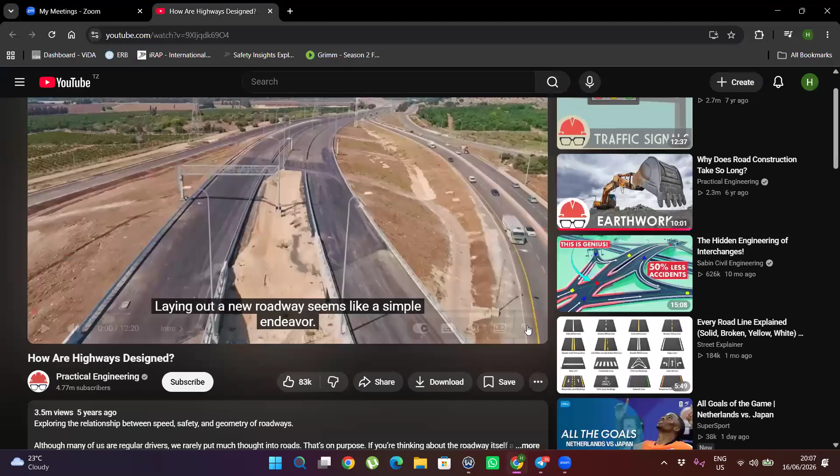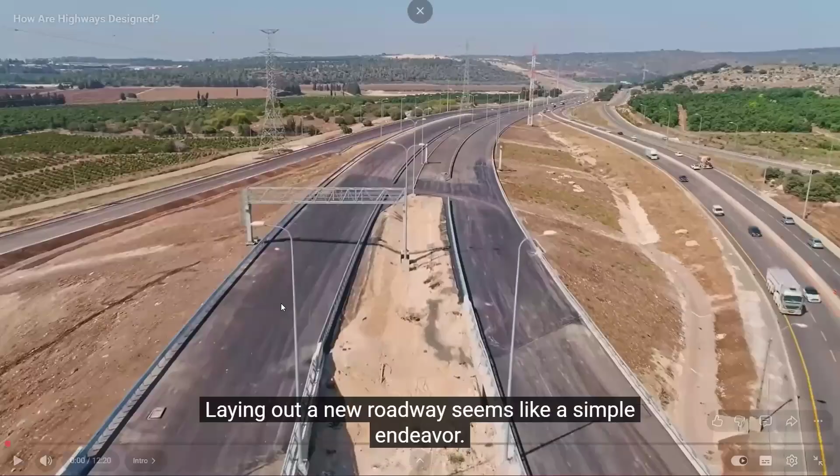A new roadway seems like a simple endeavor. You have two points to connect and you're trying to create a simple, efficient path between them. But there are lots of small decisions that make up roadway design, nearly every one of which is made to keep motorists safe and comfortable. Although many of us are regular drivers, we rarely put much thought into roads. That's on purpose. If you're thinking about the roadway itself at all while driving, it's probably because it was poorly designed. Either that, or you, like me, are just innately curious about the constructed environment.

If you put it in the context of human history and evolution, it's a remarkable thing we're able to put ourselves in metal boxes that hurtle away at incredible speeds from place to place. It's not entirely safe, but it's safe enough that most of the world chooses to do it on a regular basis. And the place that level of safety and comfort starts isn't immediately evident to the casual observer. Hey, I'm Grady, and this is Practical Engineering. On today's episode, we're talking about roadway geometrics and the shape of highways.

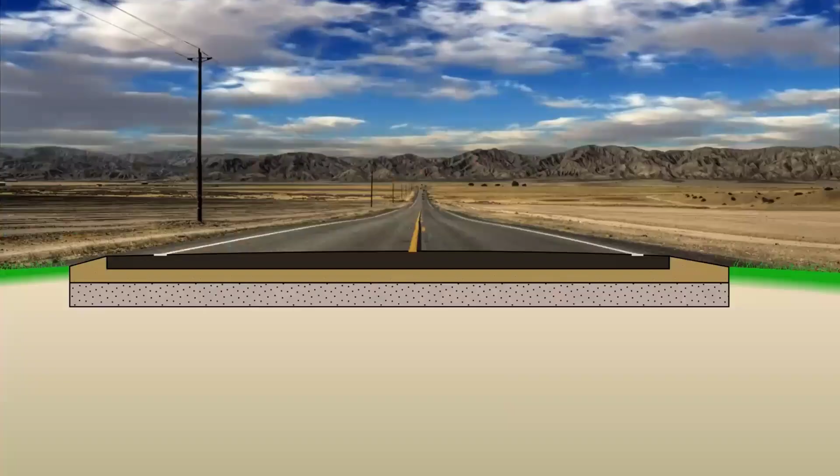The first one, cross-section, is the shape of the road if you were to cut across it. The roadway cross-section shows so much information, like the number of lanes, their widths and slopes, and whether there's a median, shoulders, sidewalks, or curbs.

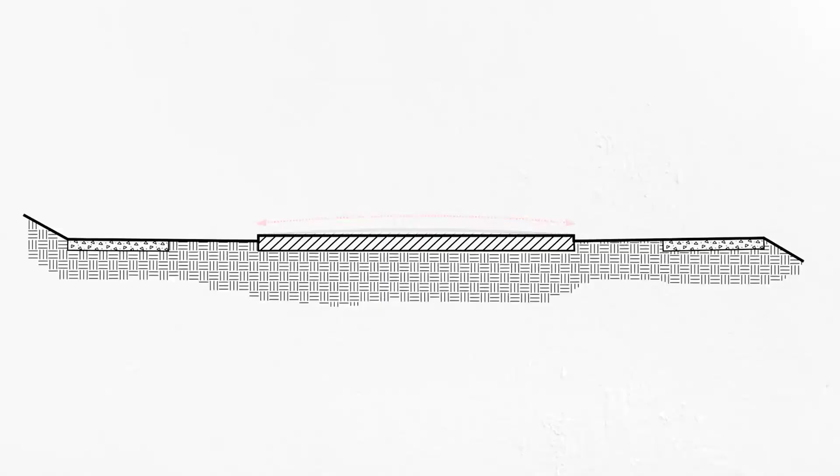One thing you might notice looking at roadway cross-sections is that they're almost never flat. The reason is that a flat surface doesn't shed water quickly. This accumulation of water on the road is dangerous to vehicles, making roads slippery and creating more ice in the winter. So nearly all roads are crowned, meaning they have a cross slope away from the center, which accelerates drainage of precipitation and keeps the surface of the road dry.

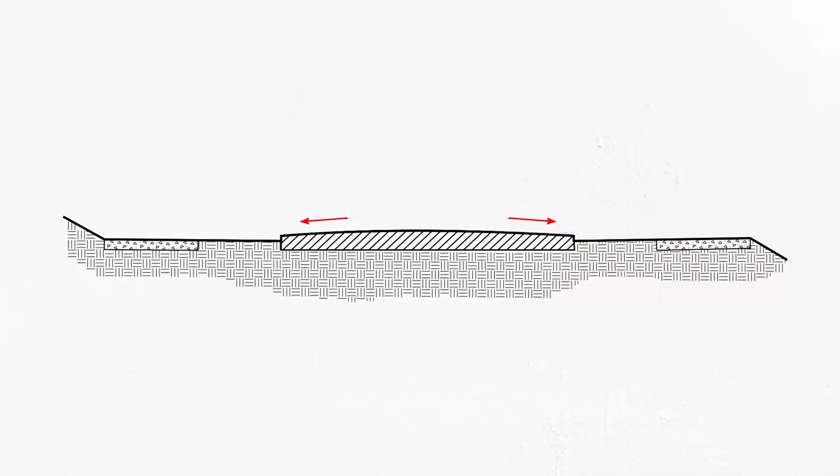But not all roadways are crowned. There's another type of cross slope that helps make roads safer. In curved sections, engineers make the outside edge higher, or super elevated, above the center line. This is also to help with friction.

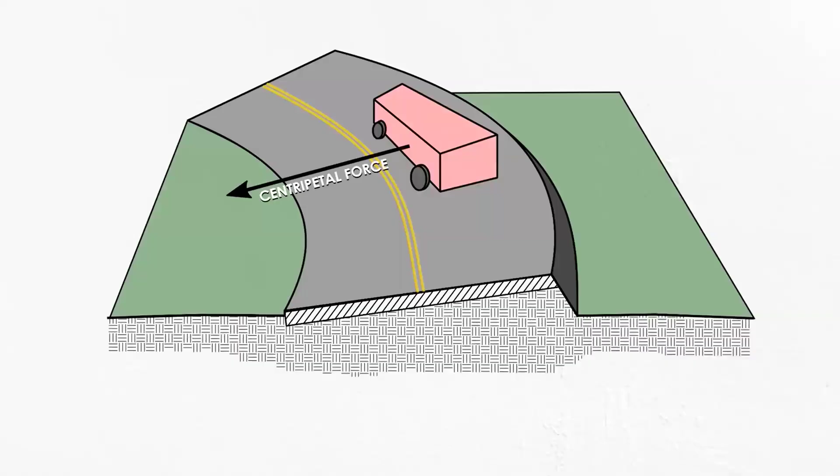Any object going around a curve needs a centripetal force toward the center of the turn. Otherwise, it will just continue in a straight line. For a vehicle, this centripetal force comes from the friction between the tires and the road. Without this friction on a flat surface, there would be no way to make the turn at all.

For example, if I roll this ball down a flat roadway, it's not going to go around the corner of the road because there's no traction. Rubber tires provide this traction against the road surface, but it's not entirely reliable.

Rain, snow, and ice significantly reduce friction. Different weights of vehicles and conditions of tires also create variability. Rather than design every curve for the worst case scenario, it would be nice not to have to count on tire friction for this needed centripetal force.

Super elevating a roadway around a curve reduces the need for tire friction by utilizing the normal, or perpendicular, force from the pavement instead. In my demonstration, if I get the bank angle just right, the ball goes around the corner perfectly, even without any lateral friction with the track.

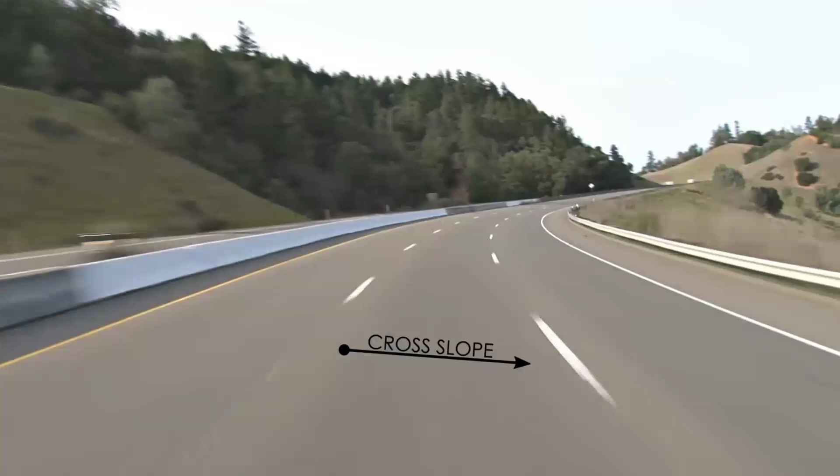If you pay attention on a highway, you'll notice that the cross slope changes direction on the outside of curves, and you go from a crown to a super elevation. The faster the design speed of the road, the higher the bank around the bend.

The shape of curves themselves is the second aspect of roadway geometry I want to discuss. Just like super elevation, the radius of a curve has a significant impact on safety. The tighter the turn, the more centripetal force needed to keep a vehicle in its lane. Crashes are most likely when radii are small, so engineers follow guidelines based on the design speed to make sure curves are sufficiently gentle.

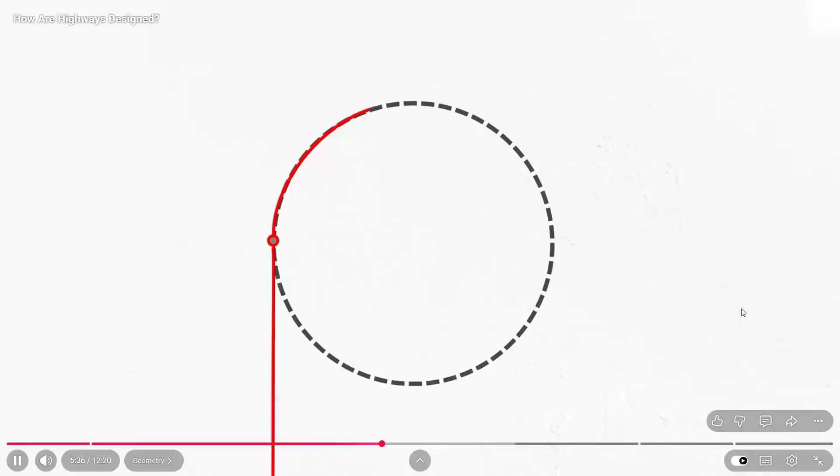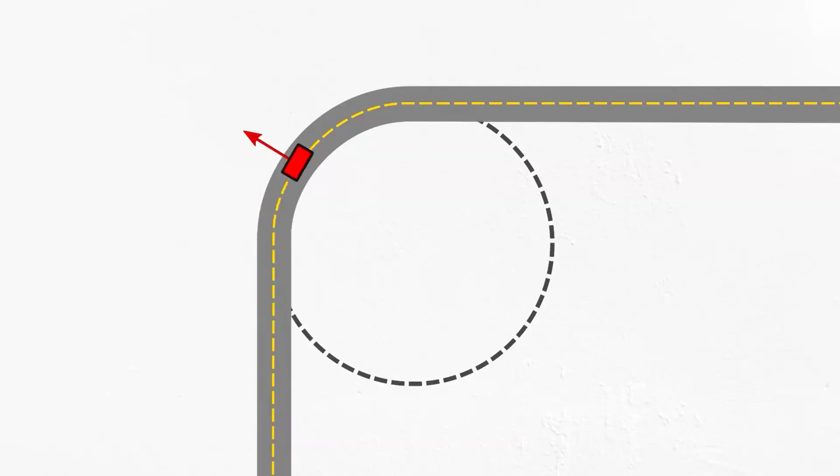It's not only the curves that need to be gentle, but also the transitions between straight sections. At first glance, connecting circular curves to straight sections of roadway looks like a perfectly smooth ride, but forces experienced by vehicles and passengers are a function of the radius of curvature. So if you go directly from a straight section, which has an infinite radius, to a circular curve, the centrifugal force comes on abruptly.

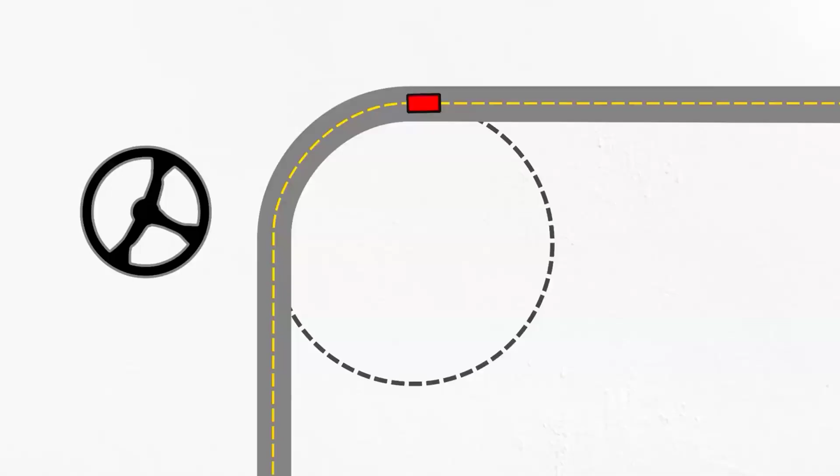Another way to think about this is by using the steering wheel. Every position of your wheel corresponds to a certain radius of turn. If straight sections of roadway were connected directly to circular curves, you would have to turn the steering wheel at a transition instantaneously. That's not really a feasible or safe thing to ask drivers to do.

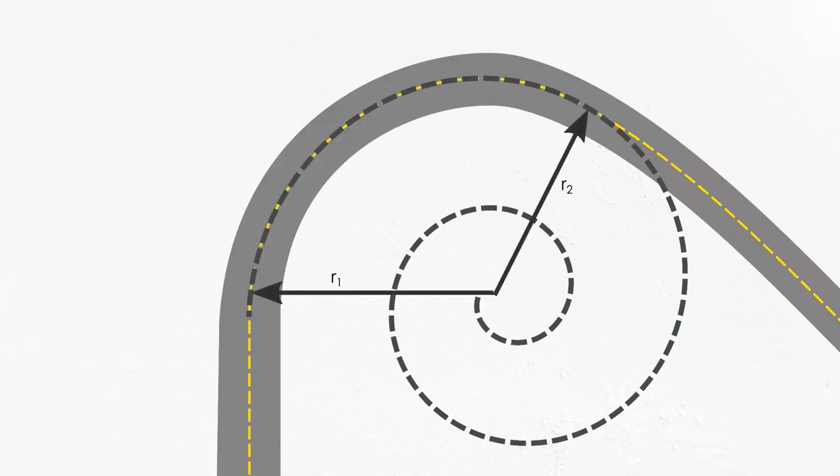So instead we use spiral easements that gradually transition between straight and curved sections of roadway. Spirals use variable radii to smooth out the centrifugal force that comes from going around a bend, and they allow the driver to steer gradually into and out of each curve without having to make sudden adjustments.

Even with all those measures to make curves safe and easy to navigate, drivers still usually have a little trouble staying centered in a lane around a bend. This is partly because tires don't track perfectly in line with each other when turning, especially for large vehicles like trucks, but also because the forces are changing and that takes compensation. Because of this, engineers often widen the lanes around curves to provide a little more wiggle room for vehicles. This happens gradually, so it's relatively imperceptible. But if you pay attention on a highway around a curve, you may notice your lane feeling a little more spacious.

One other important aspect when designing a curve comes from the simple but crucial fact that drivers need to see what's coming up to be able to react accordingly. Sight distance is the length of the roadway required to recognize and respond to changes. It varies by driver reaction time and vehicle speed. The slower you react and the faster you're going, the more distance you need to observe turns or obstacles and decide how to manage. Sight distance also varies by what's required of the driver. The amount of roadway necessary to bring a vehicle to a stop is different than the amount needed to safely pass another vehicle or avoid a hazard in the lane.

Even if a curve is gentle enough for a car to traverse, it may not have enough sight distance for safety due to an obstacle like a wooded area. In this case, sight distance will require the engineer to make the curve even gentler.

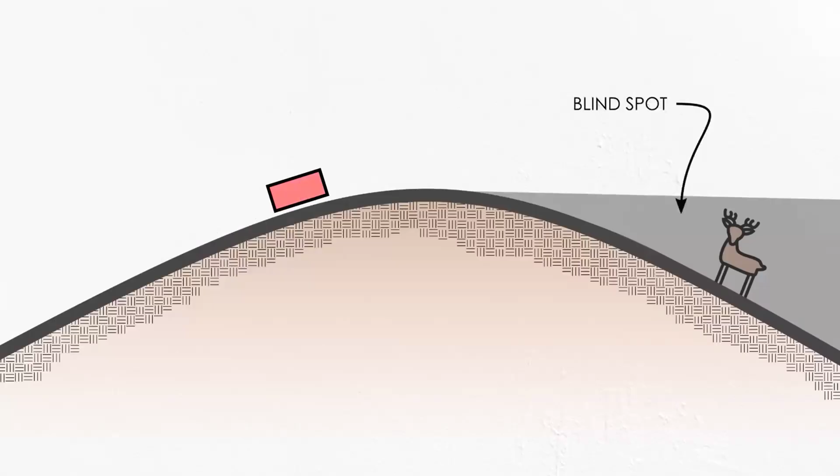Crest curves, the ones that are convex upwards, cause the roadway to hide itself beyond the top. If you're traveling quickly up a hill, a stalled vehicle or animal on the other side could take you by surprise. If that curve is too tight, you may not have enough distance to recognize and react to the obstacle. So crest curves must be gentle so that you can still see enough of the roadway as you go up and over.

Sag curves, the ones that are concave upwards, don't have the same issue. You can still see all of the roadway on both sides of the curve, or at least you can during the day. At night, things change. Vehicles rely on headlights to illuminate the road ahead, and sometimes this can be a limiting factor for sight distance. If a sag curve is too tight, your lights won't throw as far. That has the effect of obscuring some of your sight distance, potentially making it difficult to react to obstacles at night. So sag curves need to be gentle enough to maintain headlight sight distance.

Of course, there are different equations for all these different parts of roadway geometry that can tell you, based on the design speed and other factors, how much crown is required, or how high to super elevate, or the allowable radius of a curve, etc. Different countries and even different states, counties, and cities often have their own guidelines for how roadway design is done. And even then, the speed used by engineers to design the roadway isn't always the one that gets posted as the speed limit. There are just so many factors that go into highway safety, many of which are more philosophical or psychological than pure physics and engineering.

It may seem like you can just plug in your criteria to some software that could spit out a roadway project in a nice neat bow. But to a certain extent, highway design is an art form. Designers even consider how the driver's view will unfold as they travel along. If you pay attention, you'll notice newer roadways are less of a series of straight lines connected by short curves and more of a continuous flow of gradual turns. This is not only more enjoyable, but it also helps keep drivers more alert. There are just so many factors and criteria that go into the design of a roadway, and it takes significant judgment to keep them in balance and make sure the final product is as safe and comfortable for drivers as possible.

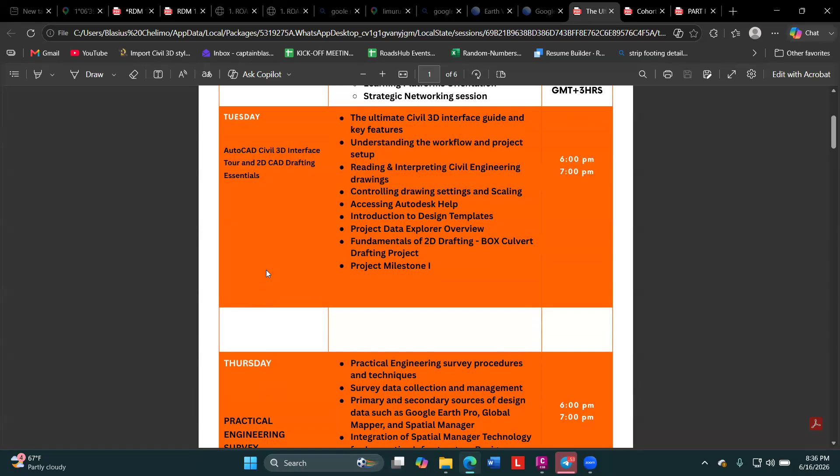So now the next class will be practical engineering survey. After drafting essentials, you're going straight to practical engineering survey. When it comes to road design or any civil works, the backbone is the survey bit - you have to survey the existing ground before doing any civil works. We'll talk about survey procedures and techniques, survey data collection and management, all that.

We'll also explore primary and secondary sources of design. Sometimes you might not be able to go to the field, for instance when doing preliminary design - you might not be at the stage of going to the actual construction area to pick topo data. So we'll show you how to extract secondary data from secondary sources for preliminary design.

Then we'll be integrating Spatial Manager technology and showing you how to integrate it. For those who haven't downloaded Spatial Manager, go to the link shared in the channel - there are a set of softwares displayed there: Civil 3D, Spatial Manager, Google Earth, and SWDTM. Make sure you download all four, because we'll be using all of them.

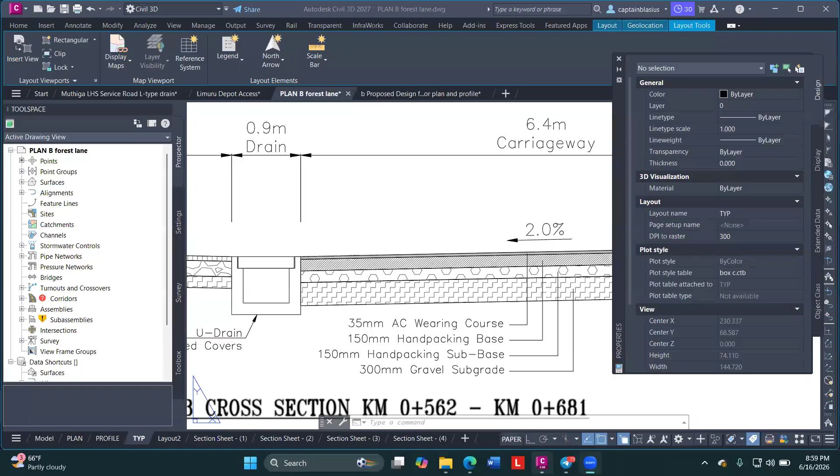So this is what we call the main channel, the first channel that you are added to. I'm going to talk about these channels and what their purpose is. The main channel is the main platform for communication - this is where you'll find everything, be it class meetings, additional resources you need to check on, or class recordings.

For the class recordings, like the one we're recording now, that's the 2-hour recording. You also have short recordings - after each module, let's say we've done the 2D drafting, after 2 or 3 hours we'll share the full class recording as a link so you can click and access it. On top of that, we'll share additional short recordings, maybe 5 to 10 minutes, specific to something.